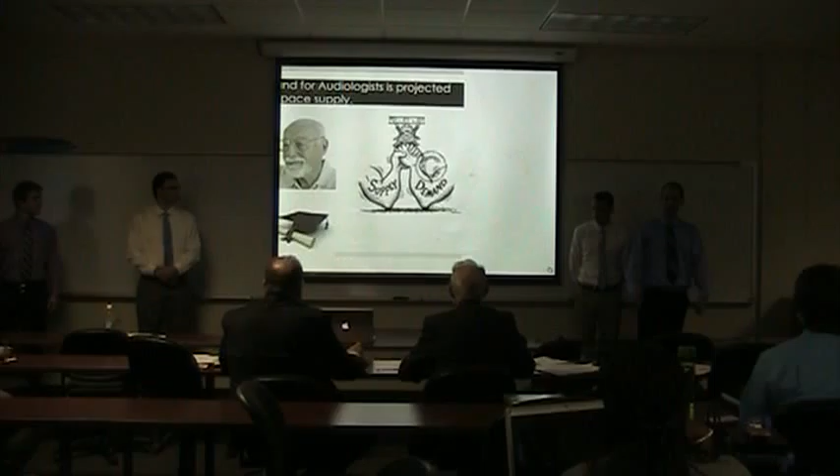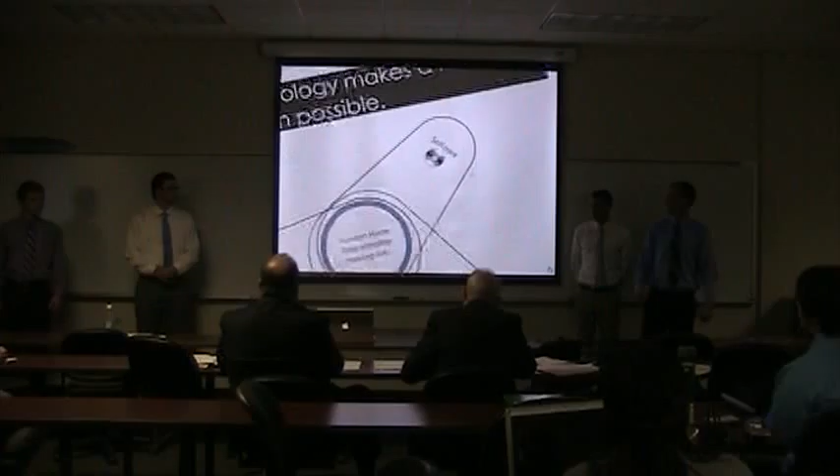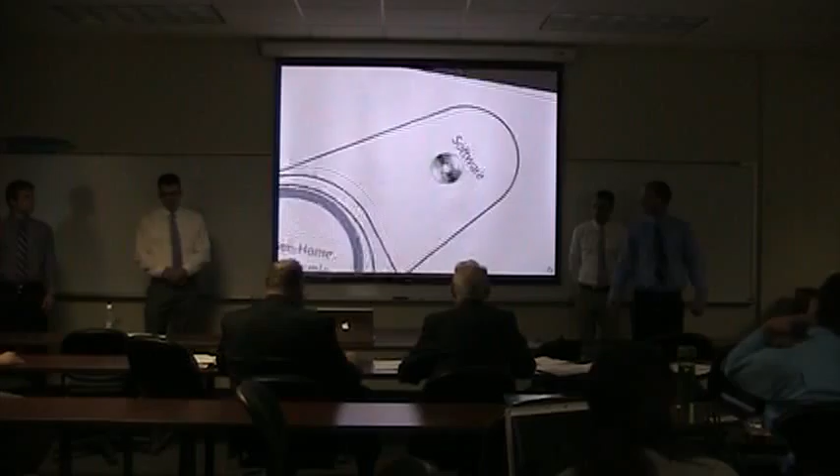Here's some background on the problem. Americans are living longer these days and are more lively in their older age. The baby boomers, who invented rock and roll, are paying for it now due to hearing damage from rock concerts. More of us need the expertise of an audiologist, but audiologists are hard to come by and harder to produce. 18 states have raised the bar to at least a master's degree, with doctorate degrees becoming more prevalent as a prerequisite. This means demand for audiologists is projected to outpace supply, and will continue to do so. So what do we do about this?

Foreseeing a potentially massive market, a small startup company named Aurasen designed an idea that would allow them to put programmable hearing aids into every home at an affordable price. This three-part project consists of a software team, who you heard from earlier, responsible for producing the program that runs on the home Windows-based operating system to tune the hearing aids; an internal hardware team, responsible for designing the specific circuits, components, and electronics in the system; and us, the external hardware team, who design the external enclosures, couplers, plugs, and the like.

Even external hardware in and of itself is a four-tiered approach. We have four different aspects of our project. First is the ASP enclosure, the programming box that sits outside of your computer on the desk. You plug it in, and also hook your hearing aids into it. Here's the objective tree for it.

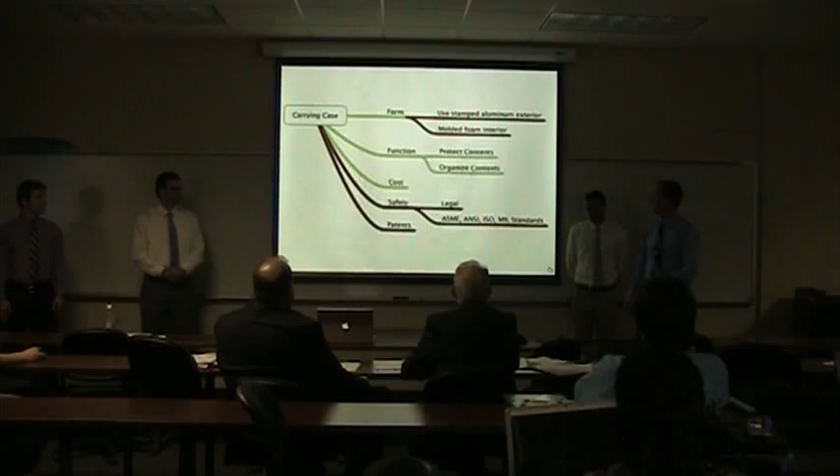The third component is a magnetic coupler. This is what lets you program your hearing aids at home. A few products exist for this right now, but plugging the hearing aid into a data cable to program it is atrocious—like trying to thread a needle that got run over by a car with a piece of paper. It's a big problem, especially if you're old. I don't even have steady hands at 27, so I can imagine by the time I'm older. This will allow us to use magnets to make plugging in your program very easy. It provides physical connections that are self-aligning and polarized, so you can't plug the left programming cable into the right hearing aid. We're also going to use an inductor to transmit the data, and we'll get into that in a second.

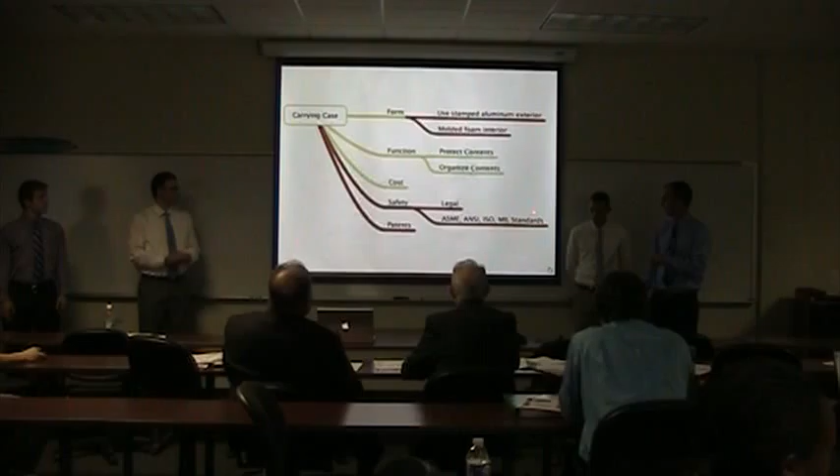Finally, the last aspect we're working on is a carrying case—something you put the entire system into, and it's what you see when you first unwrap the product. We've received a few constraints from the customer: they'd like a stamped aluminum exterior for a professional, sturdy look, and a molded foam interior so that when you open it up, there are little recessed cutouts to help organize everything.

So we're looking for a very top-notch, professional, even medical style appearance, and obviously any applicable legal and engineering standards. We want to follow those as well.

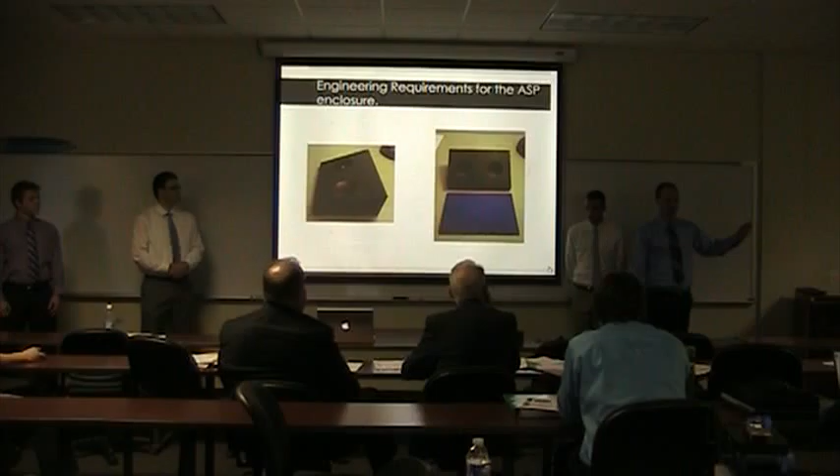Moving on, let's get into the engineering requirements for each of these. This is our second draft for the ASP enclosure. We printed this one, it's actually right here if you want to see it in real life. The engineering requirements for this device are that it has to house all the internal hardware, all the circuit boards, speakers, things like that. It has holes for speakers, two speakers spaced appropriately to provide adequate stereo sound.

It also needs to have holes for your data connections. Obviously this thing's got to plug into something, so there's got to be a hole for that. And it's got to be relatively rigid. If someone knocks it off the countertop, we want this thing to survive, and we also want what's inside to survive.

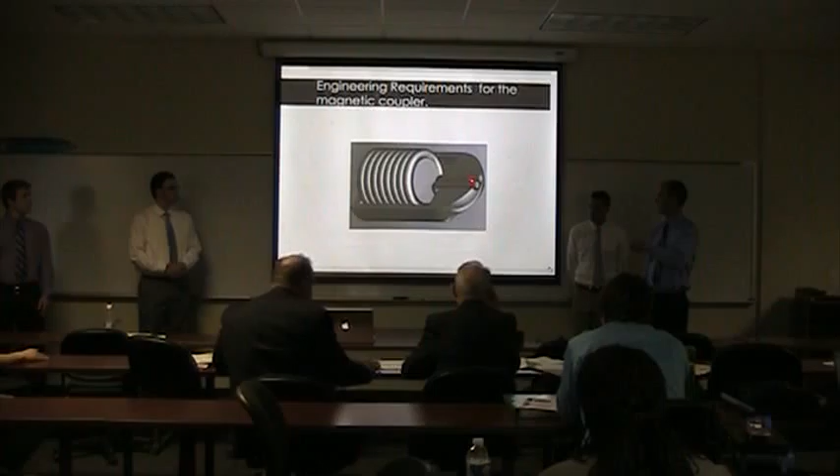So here is the magnetic coupler. This just facilitates the insertion of the programming cable into the hearing aid itself. We know it needs to be polarized, so you can't plug the wrong hearing aid programmer into the wrong hearing aid. It needs to use an inductor to transmit data, so there actually isn't a physical connection like a USB cable or a power cord when you plug into the wall. It's actually wireless, but over a very short distance using a magnetic field.

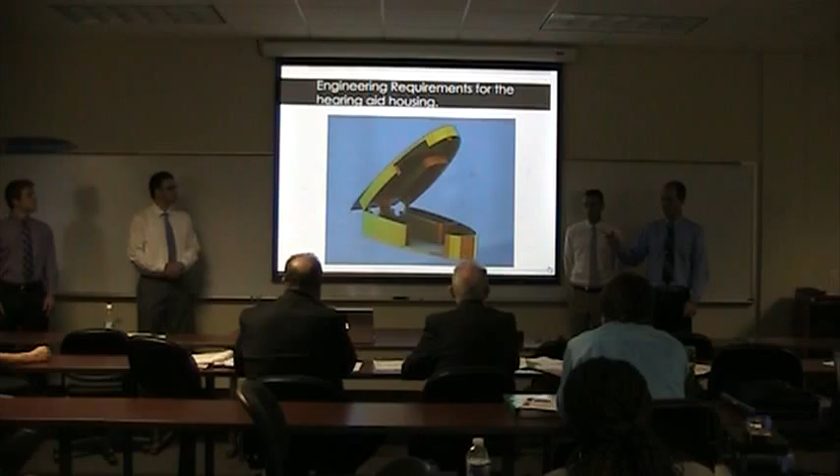In the hearing aid housing, it's essentially just copying an existing housing that was given to us. This is a rough, unfinished model that Justin drew up for us. The major modification here is that it has to accept the female end of the magnetic coupler. So however the male end looks like an end of a data cable, this one has to be able to receive it. It also has to have the other polarized magnet so that you can't plug the wrong cable into the right hearing aid.

And finally, the carrying case - it needs to protect everything, hold it in place, and provide a very top-notch professional appearance. So I'm going to hand it off to Phil.

As far as standards, we are continuing our research regarding standards. In particular, we took a look at the mil standard given by our client. What we found is that it doesn't really talk about the stereo effect, like spacing, because Dan wanted us to look at the spacing. It does talk about things like if a person is in a room, how far workers should be from a loudspeaker, and for how long - basically like OSHA requirements, it's safety related. So we didn't really find anything there specifically, but we are continuing on that.

Having said that, while we understand how important standards and codes are, we also have the clinical trials, so we temporarily shifted our focus to the prototype in order to make sure we were keeping our end up for the rest of the teams.

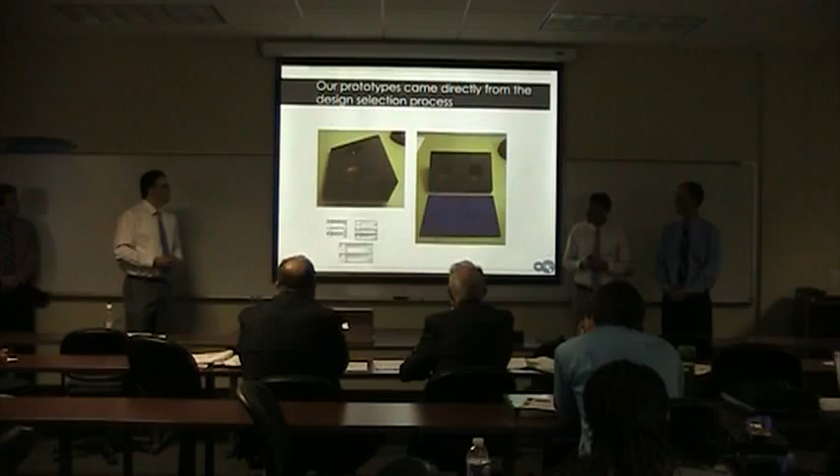So some of these, we were just thinking of how we could expand the design space for the sake of the... I have to apologize, I am not feeling well, so I'm losing my train of thought. It was for the assignment - it's a learning experience. Thank you.

So again, here's the ASP housing and the first prototype. This is the grading sheet that we used in the metrics. As an example, the top one, we gave it a 7.5 — this should protect internal hardware from impact. This is kind of hard for us to judge because we don't want to break it yet since we just printed it out, so we haven't tested it. This is our opinion of how well it'll hold up, but it's just an example of how we're using this grading sheet to grade our prototype so we can do that iterative process.

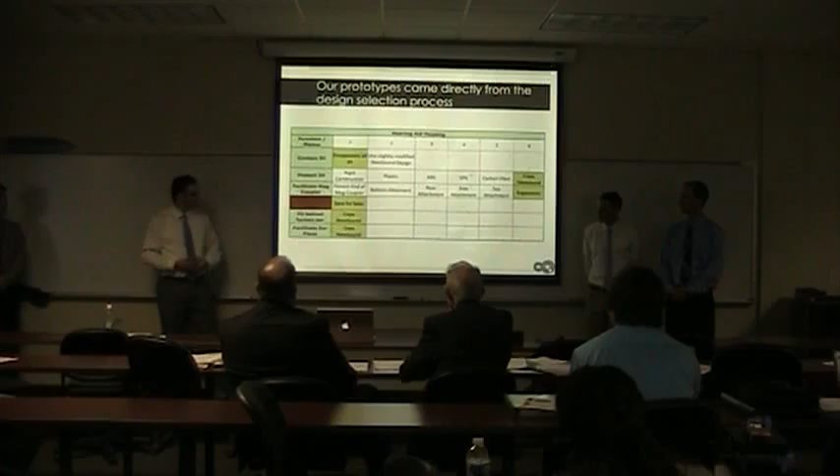Here's a couple more examples. It should allow for data cable access — it does that, so it got a 100. Another example is it should allow for notification lights. Right now we noticed there aren't any lights in the design, so we graded it low. This is all just showing how we use the grading sheet to impact our prototype designs.

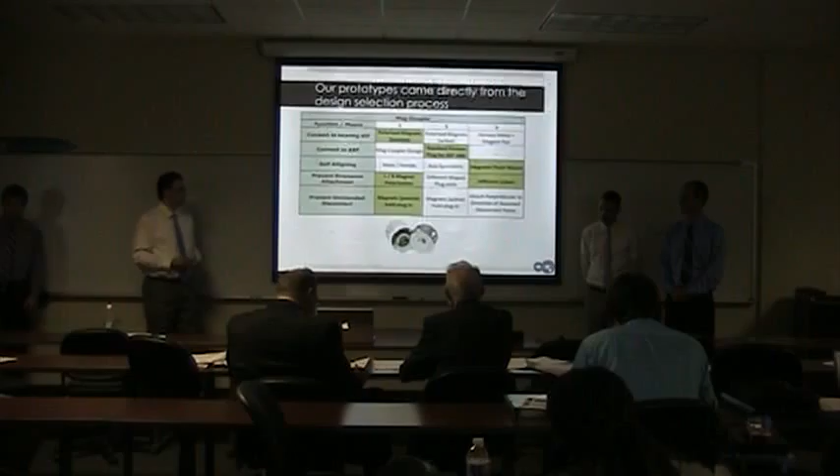Something that's very important, Dan touched on it, is that the magnets, the inductors, are polarized. So we've got basically a positive that will be embedded in one side and the negative in the other. That way they can't be confused — they actually won't connect. So that's the idea right now.

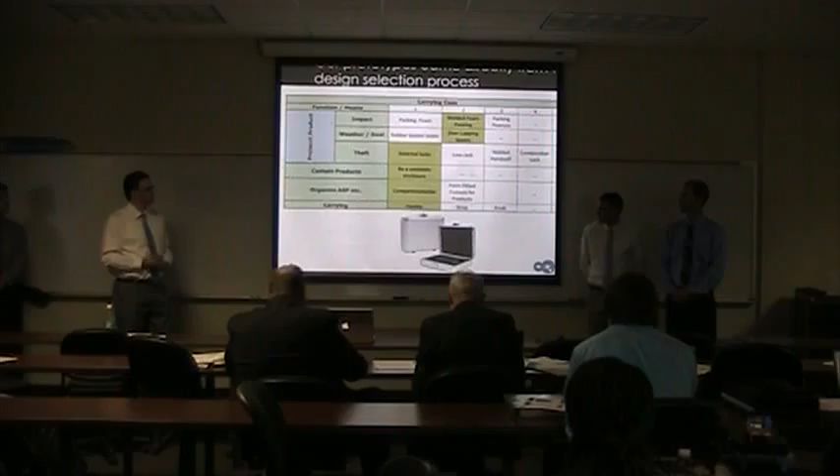Right now, the inductive data transfer is at a 1, just because we're getting all the kinks worked out. And then the carrying case — as Dan mentioned before, it needs to compartmentalize everything and have molded foam packing and things like that.

So continuing on is my technical section. Now that you have an idea of what it is we set out to design, this is sort of where the rubber meets the road. The design, analysis, and optimization is an iterative process that basically brings the best ideas forward, and this is where math, physics, and modeling all come into play. You start with an idea, and you take it, you ask what do I like about this, what needs to improve about this, and you improve it with each successive iteration until you get a product that you and your client are both happy with.

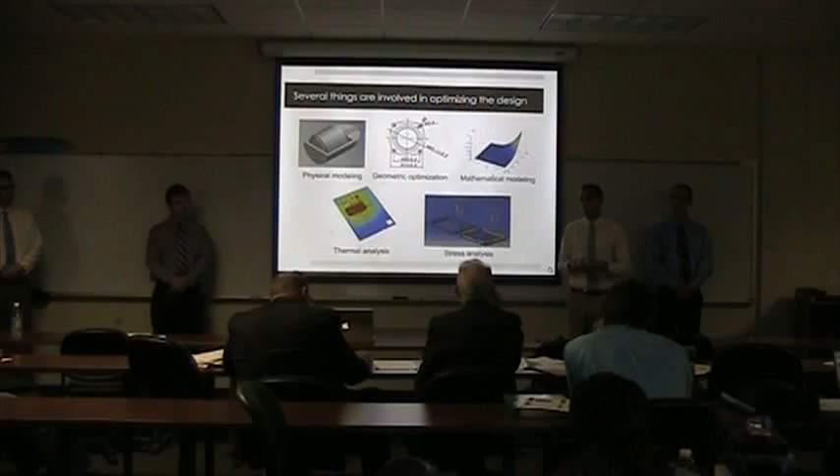Now this is by no means comprehensive, but these are some of the important parameters we considered in our design, analysis, and optimization. These include physical modeling, which has been a huge part of our project because the nature of it is external hardware — there are 3 major components we're sitting down on SolidWorks and modeling all the time. Something that follows closely with that is the geometric optimization of each part, which involves all the dimensioning and tolerancing, basically making everything fit. With that, we also have mathematical modeling we're currently working on with the magnetic coupler, basically calculating the magnet strength. There's also thermal analysis that goes into this, and also stress analysis.

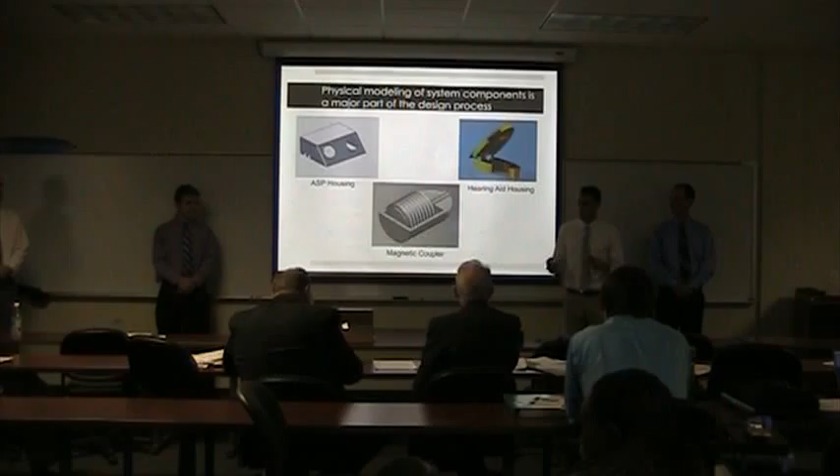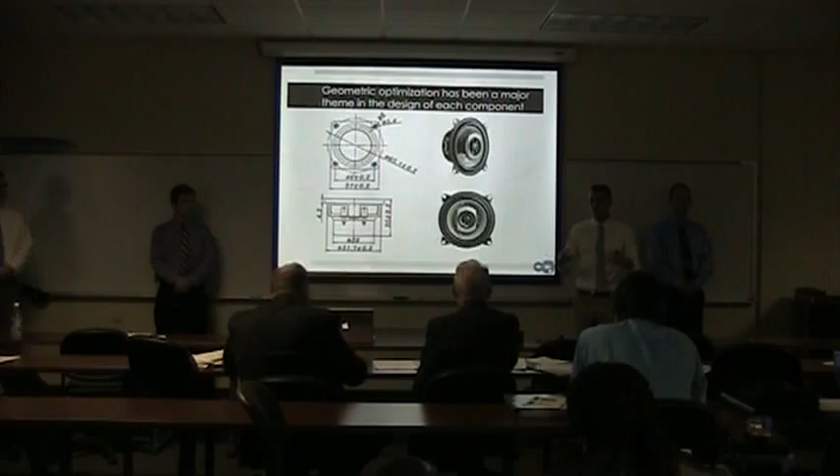The geometric optimization is really huge because a lot of this is physical parts. Does this fit? Does this connector go in the right place? Does the PCB mount properly? All of these are design considerations that we've had to wrestle with a lot in this process.

For the thermal analysis, we touched on this last semester, but after an ongoing conversation with our internal hardware team, it was determined that the amounts of power we're dealing with here are pretty much negligible as far as heat transfer. Because we're using USB power, we're talking less than 5 watts of power draw, which, to put that in perspective, is about what your cell phone draws when it's charging. So we're not worried about heat transfer in the ASP enclosure. Heat sinks, which we anticipated having to design, and ventilation are unnecessary. We decided we don't want to over-engineer this, and we moved on.

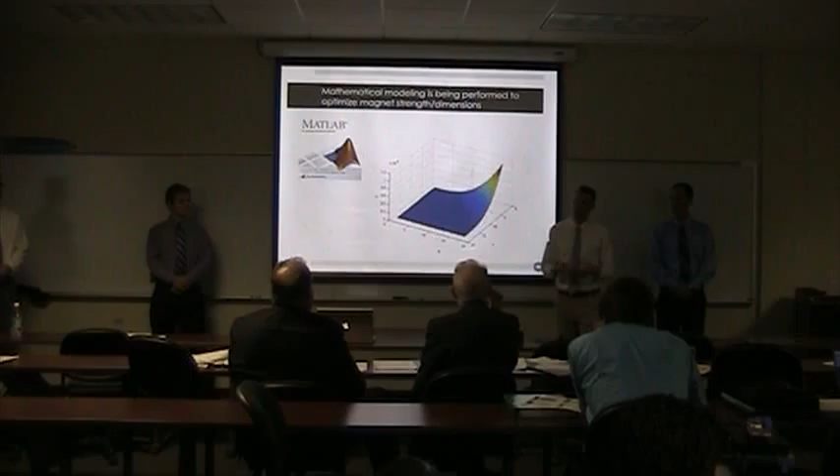Also, the mathematical modeling goes into play with the force of the magnetic couplers. We have a lot of tiny magnets that we've been playing with, and we thought the best way to determine the magnet strength would be to hold all of these in our hands and connect them and see, does this feel good? Is it too strong? Otherwise, you look at 5 newtons or 1 newton. How do you know if that's too strong or not? From that, we're going to determine the force that we need to deal with and whether we're going to go for a ring design on the magnet or just a cylinder design.

From that, we'll be able to model in MATLAB using the right equations our design space and what inner radius and outer radius we want to use for the ring design.

Now the ASP enclosure, like you've heard before, I was privileged to be able to model this, and I've been working on it a lot. Now we've come up with 3 iterations at this point.

See the first iteration, it's very basic, not a lot of the main features that we want there yet. The second iteration, as you see here, we move forward a lot with speaker holes and mounts, all that stuff.

We actually have it here. We printed it out on our 3D printer, and it's very basic. It's got the speaker mounts, it's got mounting bosses on the bottom. There's a bottom piece that we didn't bring, and we like it. This design is something we discussed with our clients, the wedge design. This was cool for us because you don't really know how something feels or looks on the computer screen, so this gives us a good idea of how big it actually is.

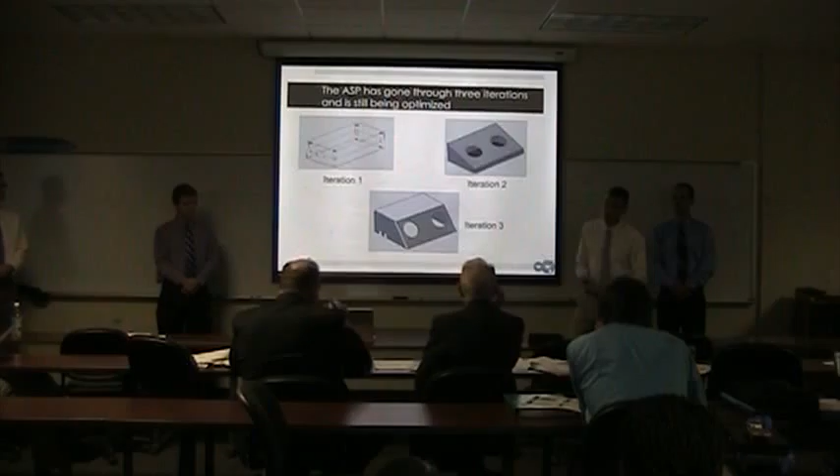And of course, this isn't our final design. I'm stepping on the toes of Justin when he talks about prototyping, but this goes hand in hand with the prototyping process. The next iteration is something that we have right now that we haven't printed yet.

This allows for the correct connectors, which are 2 S-video cords and a mini USB-C right here, as well as the speaker mounts, a bit of a different trapezoidal design that we thought would be more aesthetically pleasing, and is also more space efficient, which goes with the geometric optimizations.

Can we make this fit better? Can we make it more compact? Can we reduce our shipping costs when it comes to manufacturing?

Now Justin is going to tell you about the modeling of the magnetic coupler.

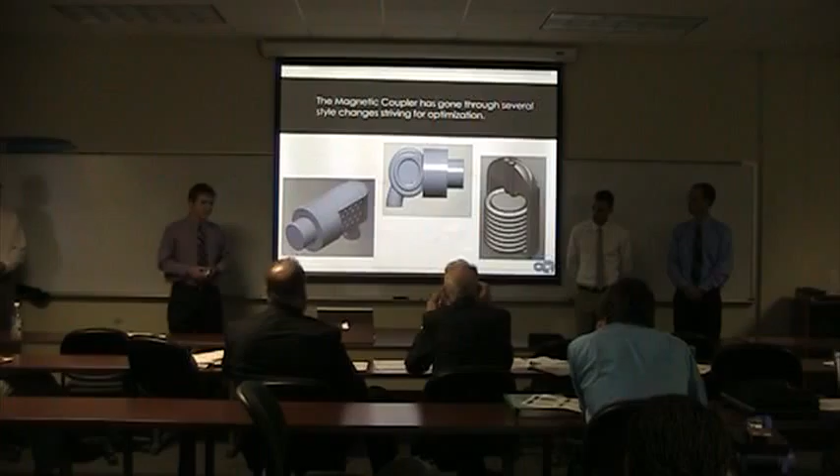Thank you, Mr. Davenport. The mag coupler so far has gone through several iterations or designs as well, as Mark showed you for the ASP enclosure. Some of the things that we've dealt with are the orientation of the wire, whether it's going to be straight or curved.

A new development that we've made is to make the mag coupler case 2-piece, to make it easier for the injection molding process. As you see there, there's ample room for the magnet size wrapped with wire that we're dealing with, as well as a hole at the top to allow for data transfer.

As far as the hearing aid housing goes, it's also gone through several iterations. This picture that you've seen many times was based off the original New Sound model, just from a picture, because we had to send it into China for a while, but it stayed fairly accurate.

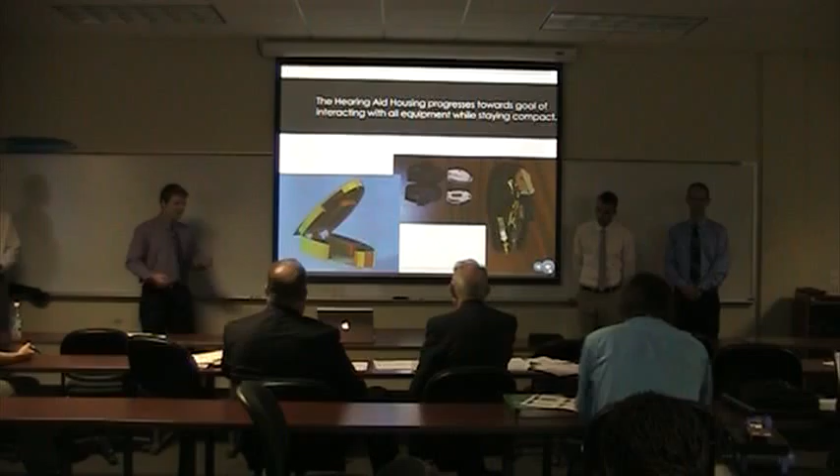The printed model was made larger intentionally to allow room to test different size magnets for magnetic strength. We wanted to make sure the magnets were strong enough to stay connected with the appropriate amount of movement, since nobody's going to be a robot and stay still for however many hours this takes.

We also wanted to make sure it was not too strong, so that ideally you can disconnect it with one hand, but if that's too hard, we'll compromise with two hands. It's still much easier than the former method of having to find the little holes to plug into. So that's our goal for progress with hearing aid housing.

Now to transition into the prototyping process of the three main components.

For the ASP housing, the main goals we strived for were to make sure there was ample spacing for the speakers, as well as the circuit boards provided by the internal hardware design team. We also wanted to account for optimal user interaction, such as having the speakers distanced apart and at a good angle for a good acoustic environment.

At first we took a recommendation from our client to use expanding foam. However, the brand we got from Home Depot didn't work as well as planned, though there are good foams out there. We didn't have time to pursue that because we had a 3D printer that could serve our purposes, so we decided to be proactive and move on to that.

As Mark already showed you, that's the printed ASP enclosure. You can see the speakers fit nicely, and there's enough room for the circuit board.

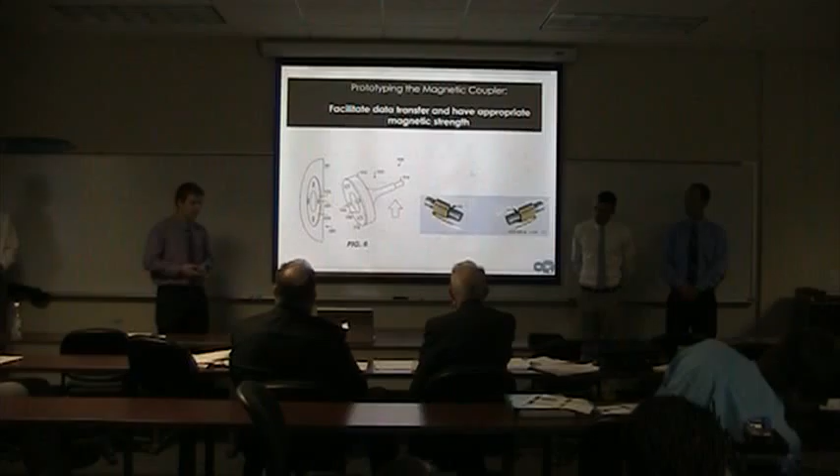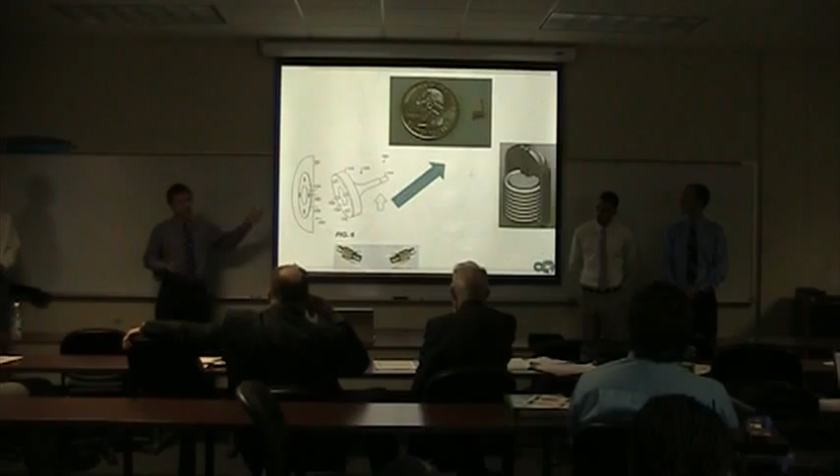Now for the mag couplers, here are some sample pictures from magnetic connections online, as well as an inductor. The main goal for the mag coupler was to make sure it can facilitate data transfer as well as have appropriate magnetic strength — strong enough to not get detached, but not too strong so you can disconnect it with ease, especially for the elderly who might have trouble with some of the stronger magnets out there.

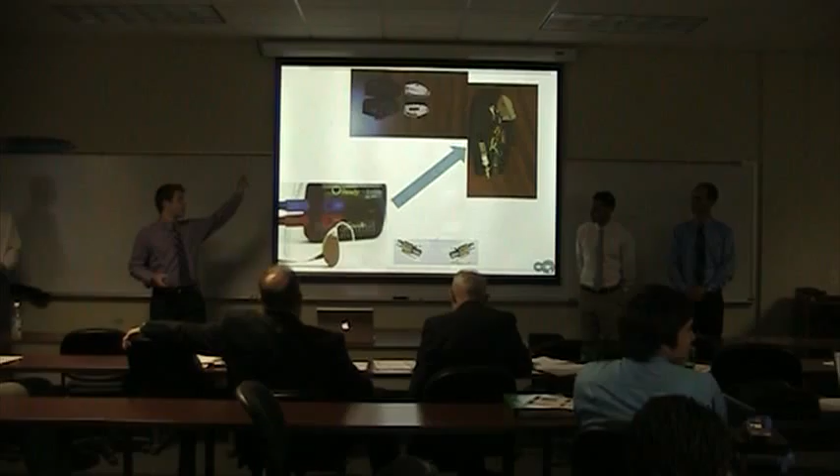So as we already went over, there's the most recent model, but we're continually iterating to make sure we can have this ready by the beta testing stage. As you can see up there, there's a magnet coil that we helped wrap, much thanks to the internal hardware team for helping us out with that.

So that's where we are with that.

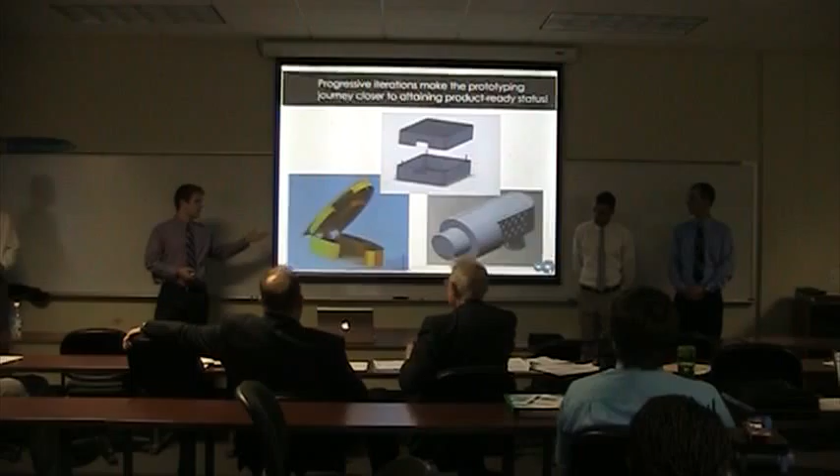For the hearing aid, here's the model that Newsan gave us — that's what it was based off of. And as you can see there, that's how the current hearing aid parts fit into it.

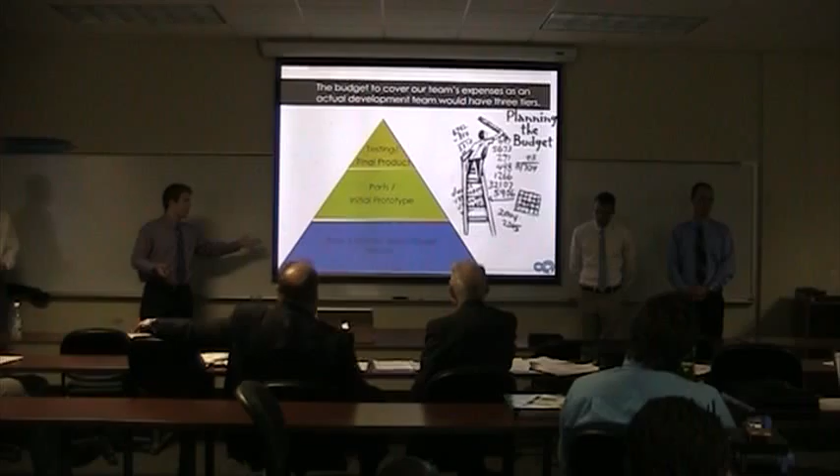As we approach the beta testing stage, we'll make the prototype as close to the same size as possible while including the magnetic inductor, which shouldn't be a problem.

So as you can see, these are the early iterations we dealt with, and as of today, this is where our three stages stand. But we're once again continually iterating towards the beta testing stage.

Moving on, here's our budget. We have a three-tiered budget. This is what it would cost if we were to actually develop the team out there — of course we'd require hours for pay, the parts for the initial prototype, as well as testing of the final product. This is our sample budget if we demanded to pay, but as a senior project, of course it's courtesy.

Here's a printed 3D prototype, so that would be the price. As far as we know so far, it's seemingly provided complimentary by CP School of Engineering. So for that, we would thank you, CP School of Engineering.

As well as the parts we have not gone to yet — this is our budget where it stands today: the parts we bought from Home Depot for the foam, as well as the magnets we used, plus tax and shipping. Only $27 so far — really thrifty.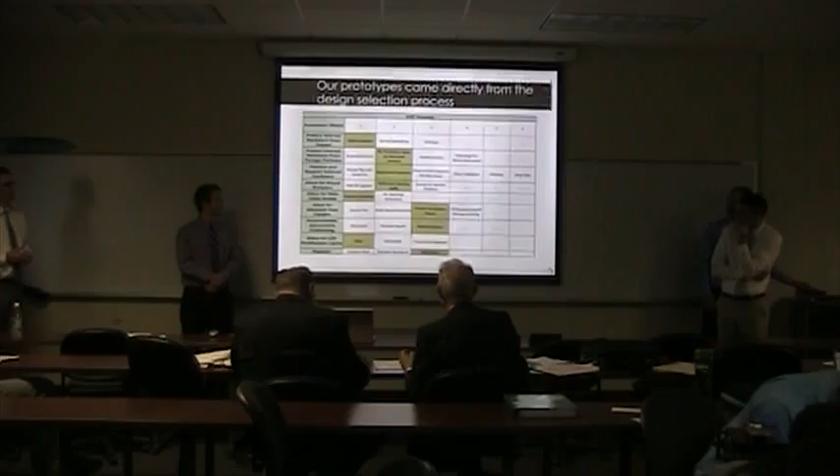Have you looked at the frequency limits of doing your data pulses on the magnetic coupling? When people do magnetic coupling, it's usually 60 hertz for low frequencies, and there's a frequency limit on how fast you can do stuff in that inductive coupling system. That's really outside the scope of our involvement - the internal hardware design, the number of turns and everything, was not us. We were purely manufacturing.

Okay, well, got to feed them that message I just gave you.

Go back to the very beginning, on Daniel's stuff right at the beginning. I got a little seasick, but go all the way back. All right, those slides right there - that's a good one. The next one.

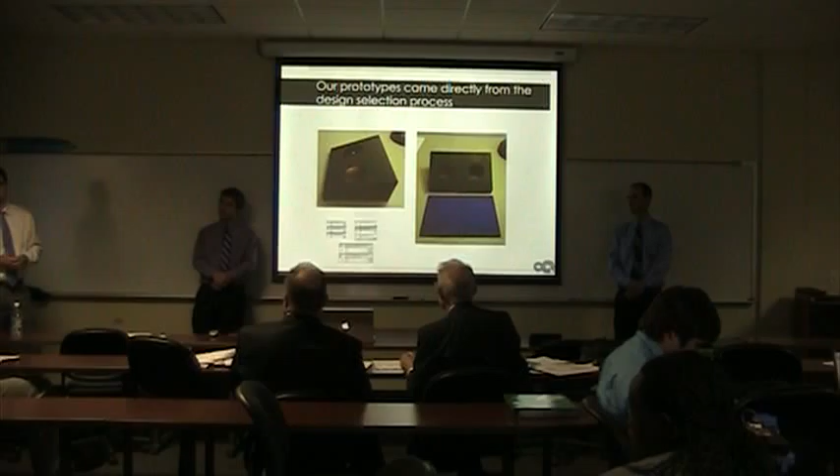Take one of those. There's several slides up there where you've got this great title, and there's a lot of good stuff in here, guys - I just want to raise it up a notch. You've got great titles and great pictures, but then when we end up wanting that point, you have no warrants. If you go back to the Michael Alley technique, you have the assertion titles, you have pictures, but you don't have the things that tell us what those pictures are saying.

Does that make sense? Are you saying text on the screen? Yes, a small amount of text with the pictures. He calls it warrants - look it up in this process. You're making an assertion, and then you have warrants, like a legal term. Those warrants go with the pictures.

So there were several of them. I got lost, especially as it was turning, and you were making points I couldn't follow with your pictures. It happened a bunch at the beginning. If you go back as an example, I think it was right at the beginning when you were doing stuff - all the way to the beginning.

Yeah, those right there - engineering requirements for the carrying case. You said what the requirements were, and they were really short and succinct. There's no reason you couldn't just put those as bullets. Why that case? Do you understand what I'm saying? I was extremely hesitant to put any unnecessary text on the screen that I could communicate verbally.

I misunderstood. Yeah, but if it's that short and it's your points, you can have it flash up there and flash off. Because it was spinning and moving from slide to slide, and then you say your points, and I just couldn't follow it. I'm just letting you know.

So go back to the previous one, a couple more. The case is one with just one picture - can you see the objective tree? Like this one? Yeah, like that. It would have been nice to know what an ASP enclosure is from a picture standpoint there, but that's okay.

There was another one like that, going back - I'll go through your handout. Fine for you, but it just was going so fast, and you were saying things critical for me to understand as an audience that weren't on the slide. Well, I also didn't want to bore people - this is the 6th or 7th time that I've explained this to them.